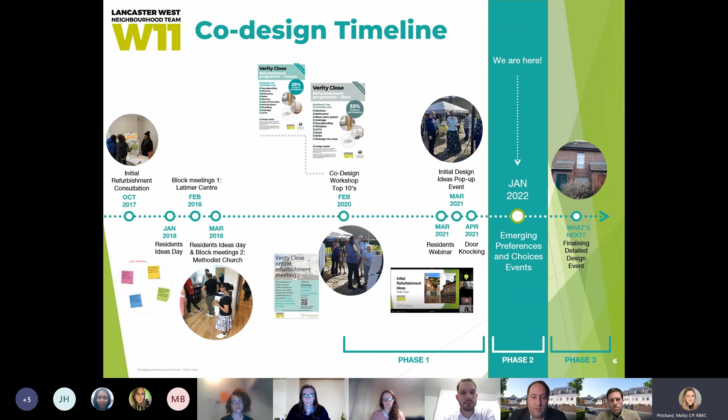So just a reminder, in terms of the top 10s, we're going to talk a lot today about the fabric elements of Verity Close and the heating and hot water. Kitchens and bathrooms are absolutely a priority too, but that's something we've already worked with residents to co-design, providing 12 different choices of kitchen, for example, and 150 different ways we've improved our internal new home standard. So we're not going to focus on all of that today.

We're going to be focusing on wall insulation, roofs, windows, ventilation, and particularly the heat network. That doesn't mean other elements won't get covered - we'll pick them up over the weeks and months ahead. I'm really pleased to say that pretty much everything on the top 10s for Verity Close is now within touching distance of being able to be delivered.

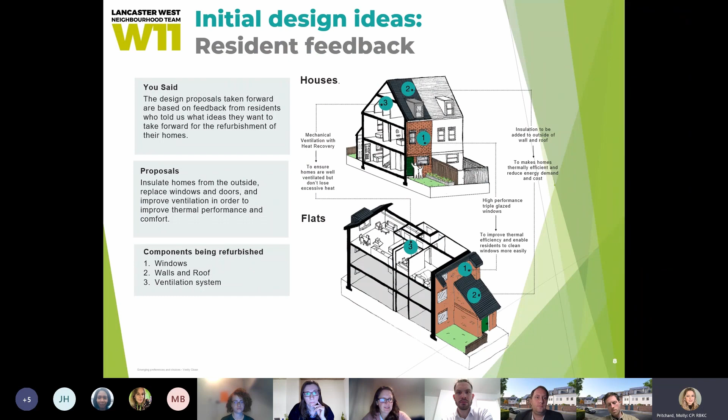So if we could go on to the next slide - we want to look in slightly more detail at the feedback we had from you since the first webinar and at the various pop-up events. Looking first at the windows, the really excellent thing from our perspective is that so many of you are positive about the idea of having triple glazed windows, and even more so that 94% of you are satisfied with whatever is most efficient. We're really keen to give you efficient windows that work well. Later we'll come on to more detail about how they can work, how you might open them, what they can look like, because there will be a change, and there's an opportunity to make sure that change is really helpful to you guys.

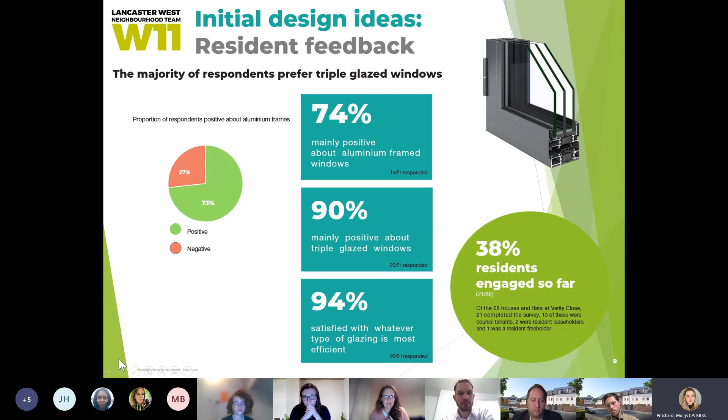And then also looking at the insulation that we're hoping to put onto the homes and the outside finish of that insulation.

Again, really great that 80% of you were mainly positive about the idea of external wall insulation. It's a much more efficient way of insulating a wall than putting the insulation on the inside. Putting that insulation on the outside means we can keep the homes really cosy and warm, like a tea cozy over your house, keeping all the heat in.

And as we've discussed before, we need to then put an external skin on that insulation to keep it dry and weatherproof. Many of you are positive about having a brick skin on the outside, which makes a lot of sense because that's obviously what you've got at the moment. But some people were also interested in having a render finish.

So we'll show you later some images of what both of those might look like, and hopefully seeing an almost real idea of what it might be will help people have a bit more detailed discussion about what you'd like to see. Next slide, please.

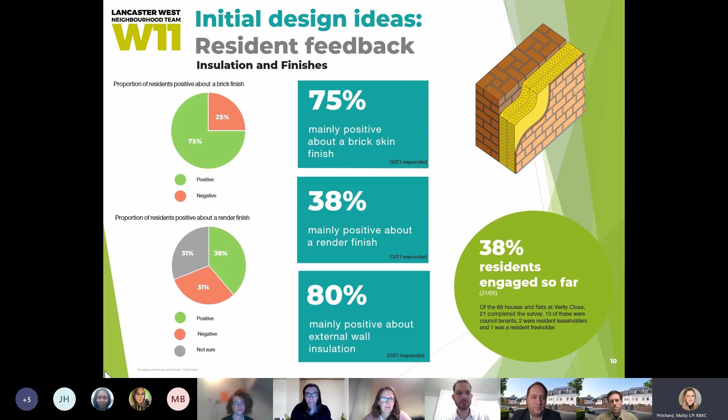It's great also that loads of you are positive about the idea of mechanical ventilation with heat recovery. It will help make sure homes are well ventilated, which is important for healthy indoor living conditions and avoiding mold and so on. But it also means that you're not losing the heat that you've paid to put into your building. So it helps keep you warm, but it also keeps your bills down.

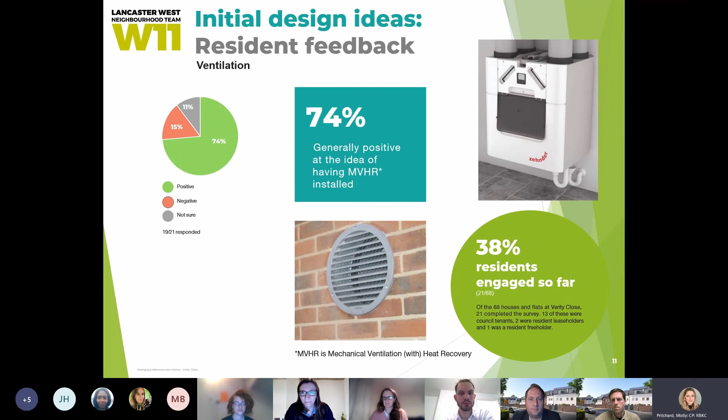So all of these things that you guys have come back with such positivity about means that we've been able to develop these ideas in a bit more detail. And that's what my colleagues are going to come on to talk about with you now. So over to Laura. Thank you, Lizzie.

And yeah, next slide, thank you. So before going through the slide, I wanted to remind you that all of them you can also find in the booklet that you have received. So you can look at them in your own time and calmly absorb all the info, especially the following ones, which may be a bit intense in terms of content, but I'm going to go through all of them, hopefully explaining them properly.

Starting from windows, first of all, as you know, we're going to replace all the windows, and there are choices to be made around how the window will open and the finishes, how they will look.

So I'm going to run through the opening options in this slide, but again, as a reminder, in your booklet you will have more pages that explain in more detail, with more graphics and illustrations, how the opening mechanism will work. And in the baseline there are some frame samples that you can play with and better understand how to open, for example, the top hung reversible.

So looking at this slide now, the first two rows show a tilt and turn opening mechanism, while the second two rows show top hung reversible. And then looking at the columns instead, there are features and characteristics of the windows that you may consider.

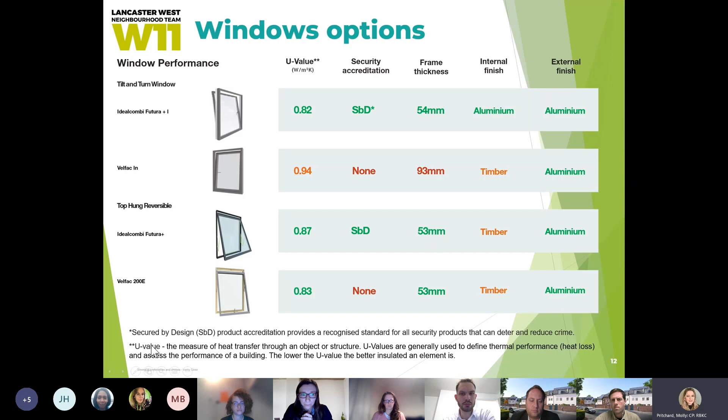In this case, for example, you are invited to choose between the finishes options of the window frame, in this case the internal color options. Next slide, please.

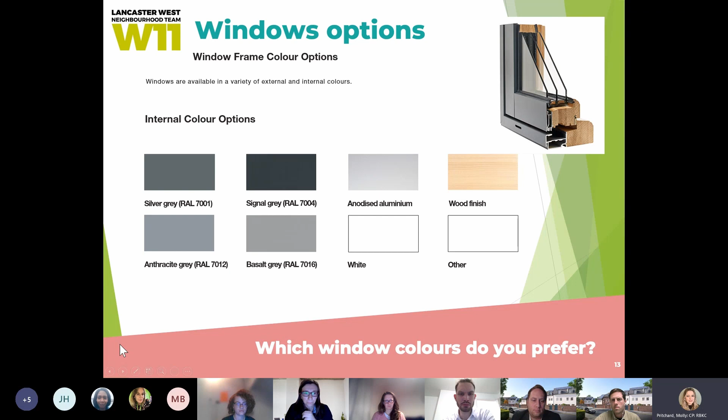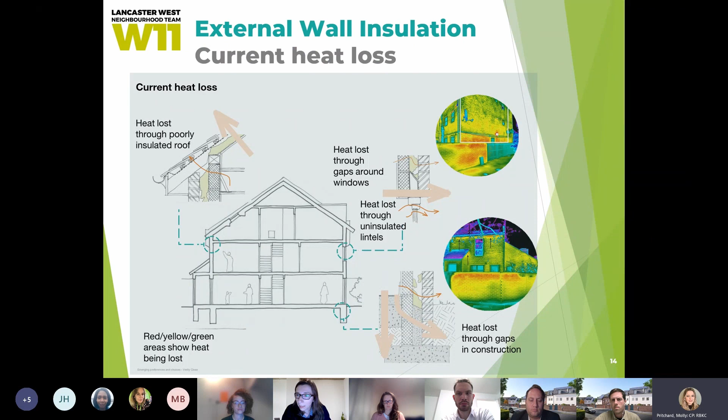As discussed in the previous engagement event, heat is lost through the fabric of your building, particularly at junctions like the wall and roof, the wall and windows, and the wall and foundations, as represented in the image here. On the right, the colored images are thermographic images, and especially on the lower one at the bottom, there is a yellow and red area that identifies the heat loss. You may notice at the junction between the wall and the roof, a crucial point of the fabric.

Talking about external wall insulation, another thing to consider is the overall visual impact of the Close. Residents can choose whether the insulation is finished with bricks or render, and you will see some visual images in the following slides. For now, it's important to notice that as only socially rented and leasehold homes will be externally insulated, the detail between the new and existing facade will need to be carefully designed to ensure a cohesive color scheme across the Close. This is something we'll look at in more detail in the following slides.

I can see Susan's got her hand up there, Maria. Susan, do you want to ask a question? Hello, hi, Susan, how are you? Can you hear me? Yes, go ahead. I was going to query that on the page for external wall insulation, it says only socially rented homes will be undergoing refurbishment, but then you just added leaseholders. I think you must have made a mistake and omitted the leaseholders there. In my brochure, it doesn't mention leaseholders.

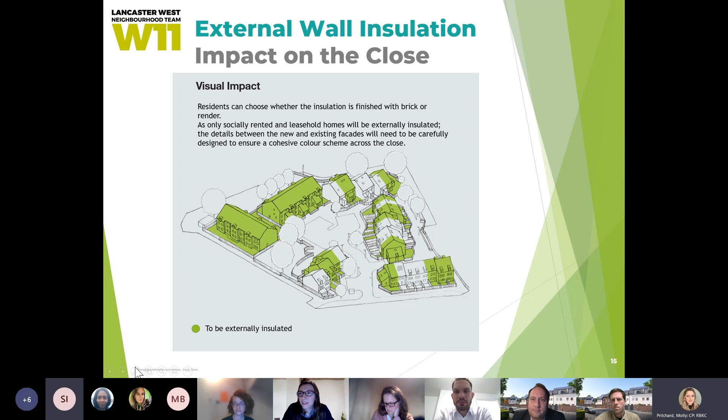To clarify, for leasehold flats, in terms of external wall insulation, windows and ventilation and the heating and hot water, they will be included. So all the elements we're talking about today will be available for leaseholders as well as tenants. That needs to be corrected on the brochure. Thanks for that feedback, that's helpful. Thank you, Susan. Next slide, thank you.

Last thing to touch on for external wall insulation: following the first engagement, 80% were positive about it, and it's worth reminding the benefits. First is improved thermal comfort, then less energy required to heat your home, and as a consequence, reduced bills. Last but not least, less internal disruption. Materials used will be A1 and A2 rated, meaning none or very limited combustibility, which we'll touch on again later in another slide.

For now, I'm going to pass it over to my colleague Phoebe, who is going to carry on talking about the external finishes options. Thank you, thank you Lara.

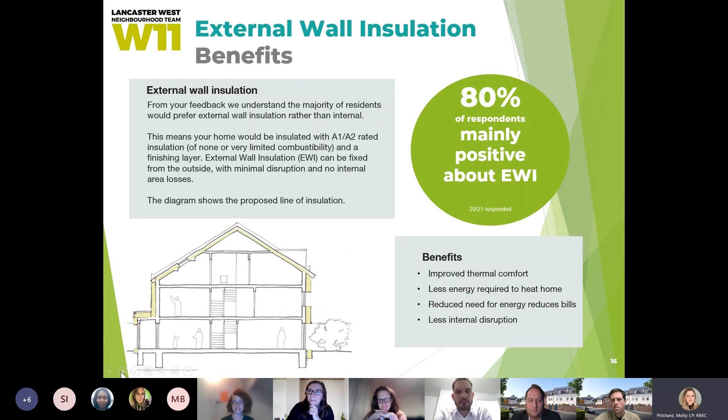I'm going to go through a few visuals we've prepared. As we're adding insulation externally, this gives you some choices in terms of how your homes will look, and we'd love to get your opinions on it. We've prepared a series of images to show some of these options, and also have physical samples of each finish for you to look at in Unit 29. The first finish choice is brick slips, which use slices of real bricks to replicate an existing brick wall. In the first visual, you can see what it might look like using a brick slip as close as possible to the one you have now, shown here on the blocks of flats.

Can I have the next slide, please? In the next image, you can see a close look at how this might look on the houses. You can get a better idea of how the thickness of the external wall insulation and roof insulation affects the appearance. With the staggered nature of the terraces, the thickness of the wall insulation blends in and isn't too noticeable, so you can get a quite close match with the bricks. On to the next slide.

The next image shows another option we've been exploring: using different shades of brick that are complementary to the existing brick and to each other, celebrating the differences in the buildings. Here you can again see it on the blocks of flats.

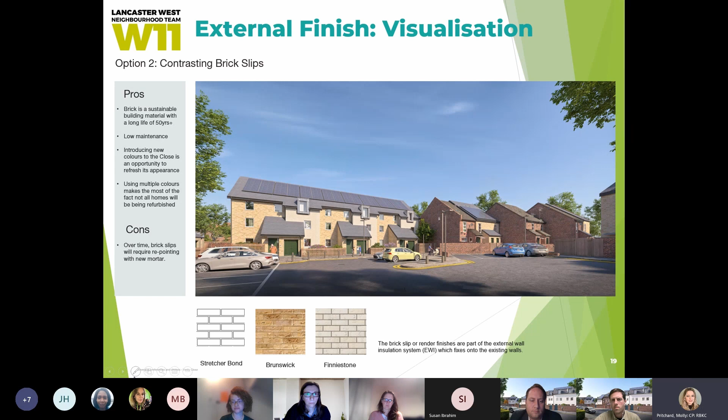In terms of colour choices for the alternative brick slip colours, there's quite a range to choose from. Here's an example using a buff brick and a paler brick against the red existing bricks. And here you can see a bit clearer how the external wall insulation might look next to the existing red bricks, celebrating the differences with these alternative colours.

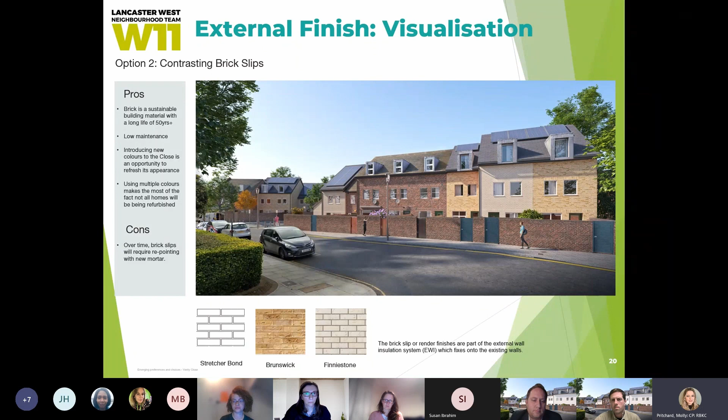We've also been exploring a render option inspired by the local surroundings, where many of the buildings have render but still have areas of brickwork. So we decided to try that out and share it with you.

We developed this further by incorporating two textures of render, one smooth and one rough, as you can see in the bottom left corner. We've done this to bring more life to the facade, using the contrasting textures to emphasize the windows.

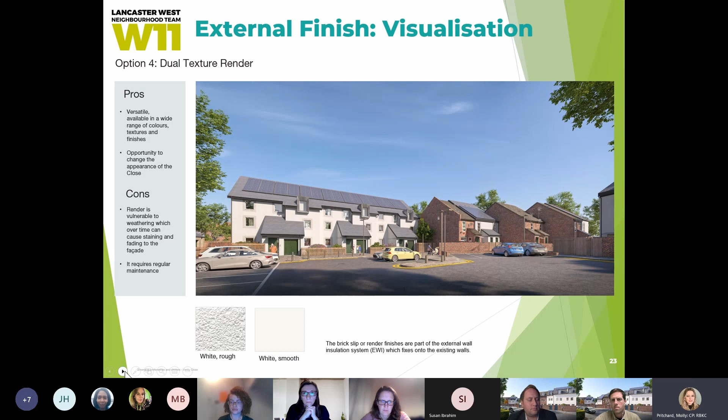And here you are again on the houses.

The roof is also going to be insulated, which means we have the choice to either replicate the existing concrete tiles or change it. Here in the middle you can see a picture of the low energy home we originally retrofitted, which features slate tiles, and on the right the existing concrete tiles next to it. So we could choose to replicate those, or go for fresher slate tiles.

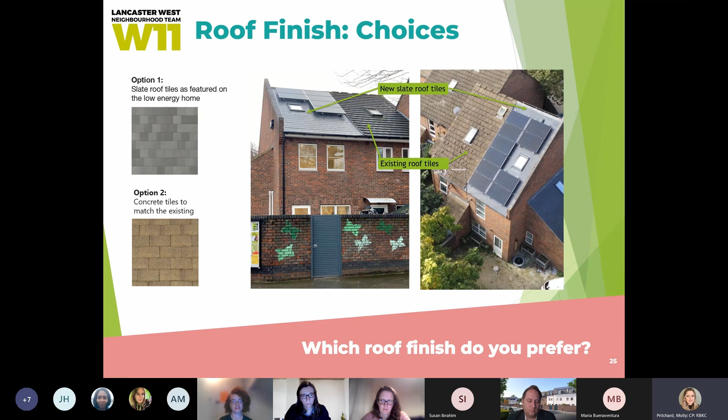Each home will also be fitted with PV panels that will affect the overall appearance. But ultimately all these appearance choices are down to your collective opinions, so we look forward to hearing your thoughts on those.

The dormer windows will also be externally insulated, which means they'll be thicker with a thicker profile. So we're proposing a beveled style on the dormers for a less bulky, more refined appearance. It also provides better solar shading and an overall cleaner appearance.

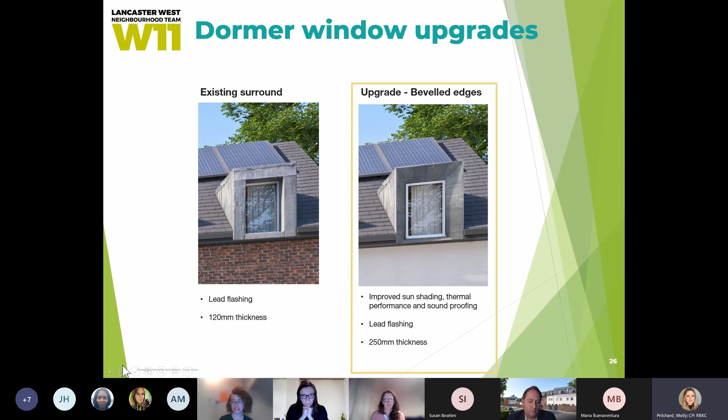I'll move on to talk about the MVHR. Yes, the MVHR, as you know, is what we're going to be using to mechanically ventilate your properties.

At the moment this sketch is just a strategic sketch indicating the possible routes that the ducting for the MVHR might follow. It's just strategic at this stage, but we will have to locally lower your ceilings to hide these ducts. We're integrating this into the design and piloting a range of measures and ways of making this as discreet as possible.

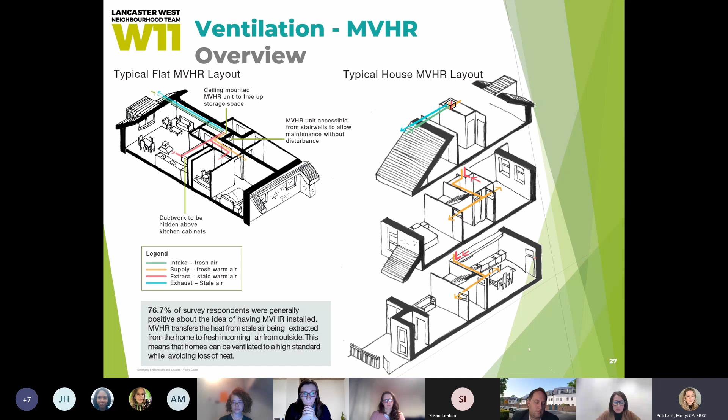For example, in this visual you can see above the kitchen units a slightly lowered bulkhead, and all that is doing is hiding that duct, but it will be integrated with the design of the kitchen, so you will hardly notice it.

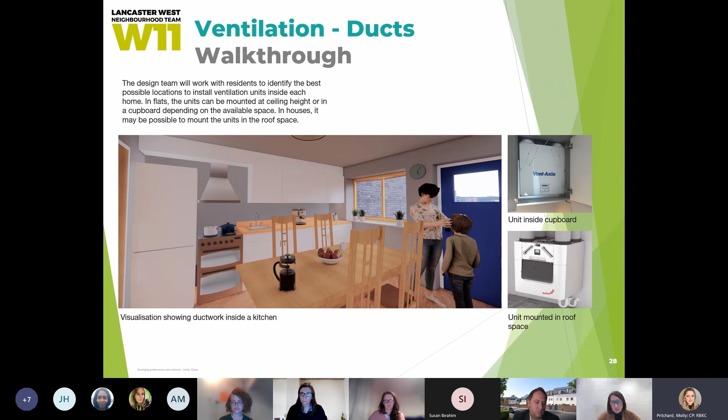This is just an example of what it might look like. As I say, we're looking at a range of measures to minimize the impact of these ducts within the properties. And we've got a little video that shows what this looks like as you move into the building.

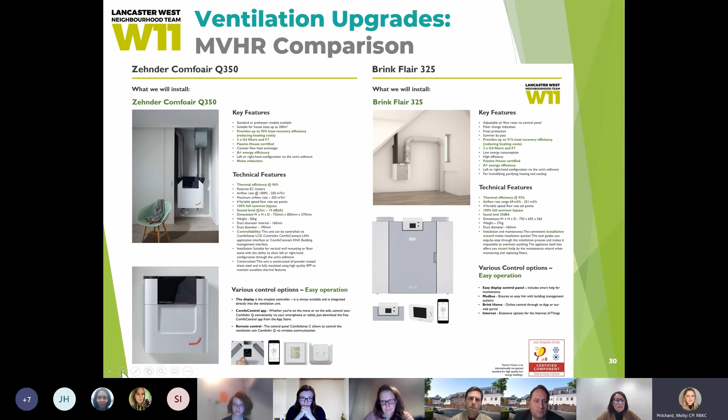Maximizing fire safety is a priority. We understand that this is extremely important to you, and it's extremely important to all of us. We wanted to reassure you because we are going through a very rigorous process assessing the fire safety of each building. We are looking at the combustibility of each material that is going to be put into your house or the flats, and we are being very thorough. We are going beyond what is required by building regulations, so you will end up with a very safe product at the end of the day.

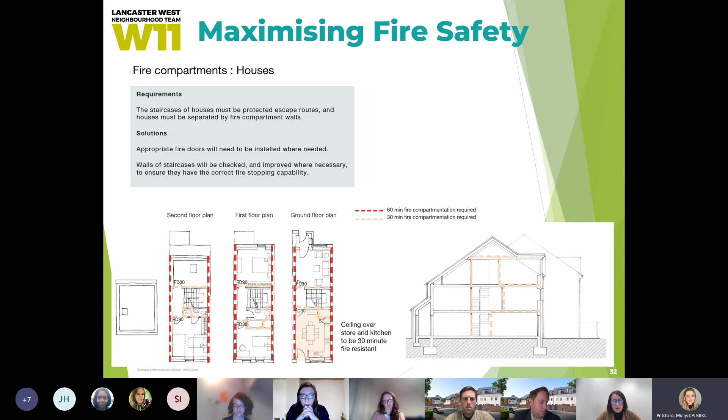Could we have the next slide, please? This is an example of the houses - what we are showing there is that the staircases will be protected, so there'll be very safe routes for escape. Where the red dotted lines are, it shows the separation between one house and the house next to your property - that's a fire line, if you like. So you'll also be protected from the property next to you if there was a fire next door. We are looking at it very thoroughly to ensure there is safety throughout the whole design.

Next slide, please. This is applicable to the flats, and we are working with Lancaster West to understand the remedial works being undertaken in the risers. Together with that, each flat will be protected, and the staircase will also be a protected means of escape. So we are looking at all this and going way beyond building regulations to ensure that this is all very safe.

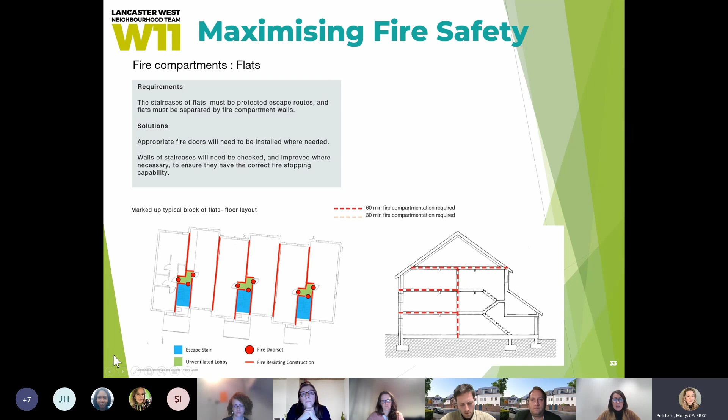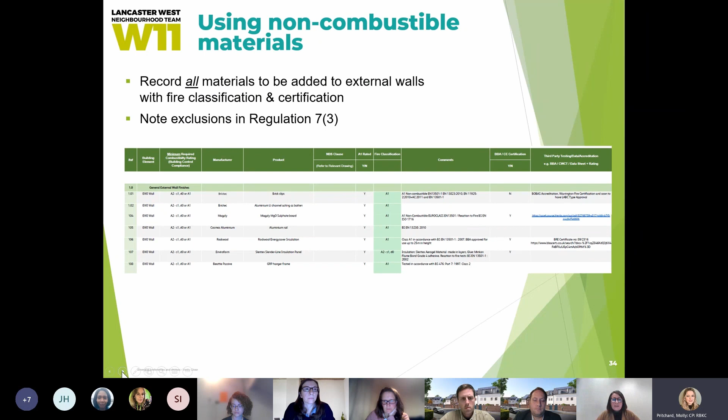Next slide, please. As an example of what I was just referring to, this is a combustibility, non-combustibility tracker. What we are doing is tracking every single material and checking the credentials of every single material, just to ensure that everything installed in these buildings is safe, so that you can have peace of mind and be assured that it will be safe and fire protected. Next slide, please. I'm going to pass on to my colleague Laura now.

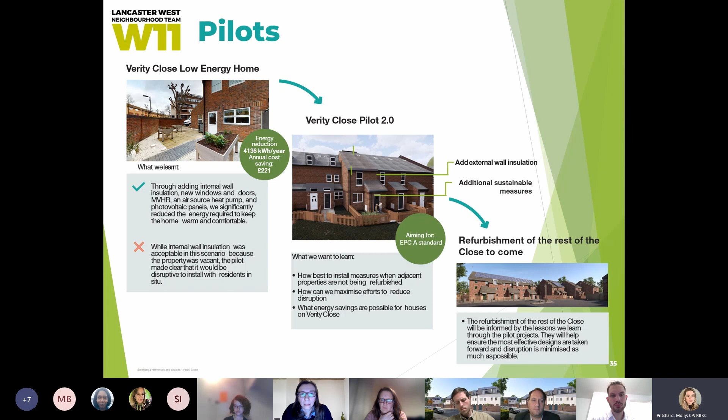Thank you, Maria. Now we look at the progress we're doing and what we are aiming to achieve. With Verity Close low energy home, which has already been completed, the energy use of the home has been reduced. Now we are working on another pilot, trying things out, learning lessons from the previous pilot, and getting better as we go along. The point of this is that by the time we design the whole close, we'll get the best possible outcome, details and design. Next slide, please.

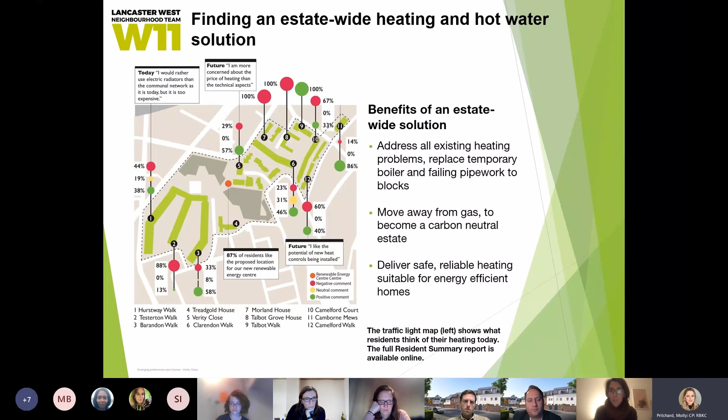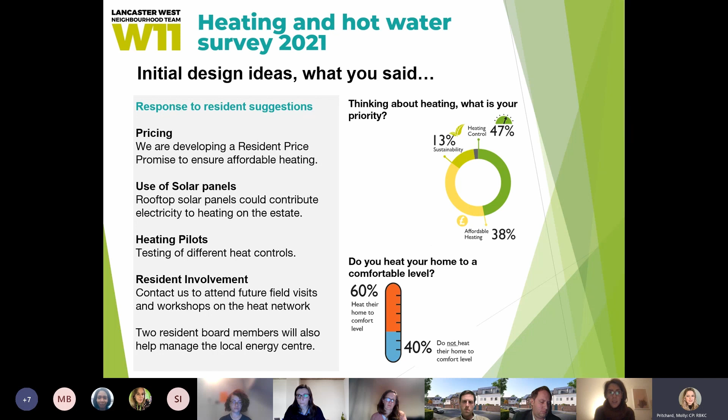Drilling down into what you've told us about heating on Verity Close today - as I mentioned, it's a lot more positive than the rest of the estate. People like being able to select their energy provider, although some have found their providers disappointing, and that's maybe a changing situation. We surveyed households about a year ago, and there have been a lot of changes in the energy market, so we understand people might feel differently about their gas boilers and heating today. It's a very much a live situation, and we definitely welcome your comments.

I'll be at the pop-up this Thursday in Verity Close.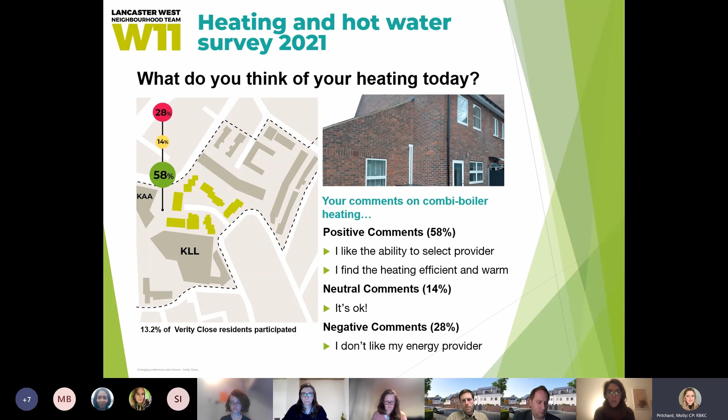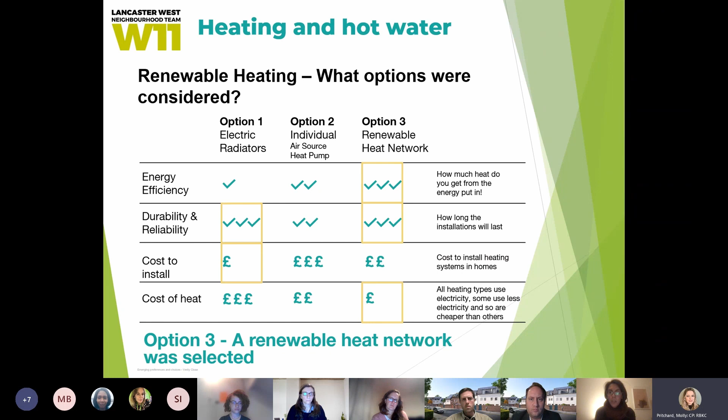So taking us back to basics, what is a renewable heat network? It is essentially plumbing at a large scale. Heat is produced by a renewable technology - in this case air source heat pumps at an energy centre hopefully located on the estate. Heat is then delivered through underground pipes to individual buildings and homes. This should hopefully replace gas boilers across the estate. We have 2 communal gas boilers that will definitely be replaced, and there's the opportunity for individual homes with gas boilers today to also plug into the heat network.

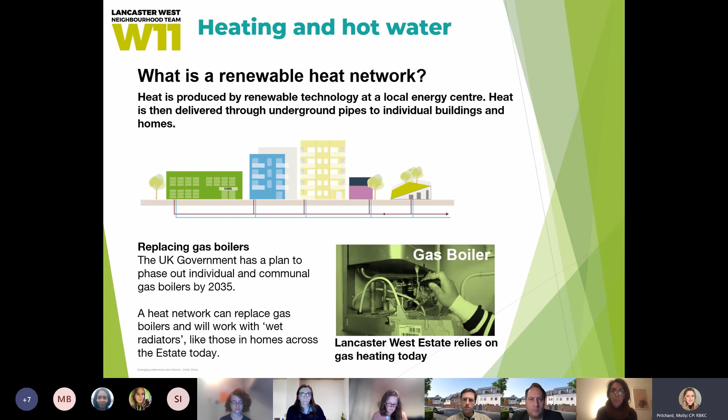So this is just a bit of a recap about how it works. The local energy centre will use air source heat pumps. There's a potential that we'll be able to supply it with electricity from rooftop solar panels on the estate, and there will be heat delivered through underground pipes to individual homes. The billing will be done on a pay-by-use basis via the council.

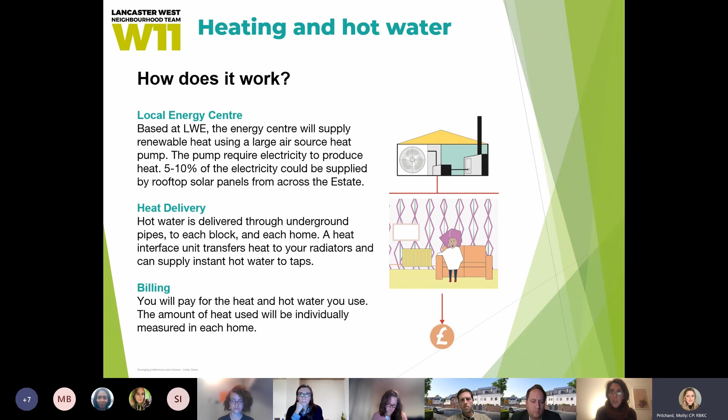So this is a bit of an outline about what would actually be installed in your home if you decided to connect to the heat network. Gas boilers would be replaced with this box called a heat interface unit. It's virtually the same size as a standard combi boiler. You can get some very fancy, slimline versions, but most of them are the same size as a gas boiler. It's got quite a few advantages in that it transfers heat.

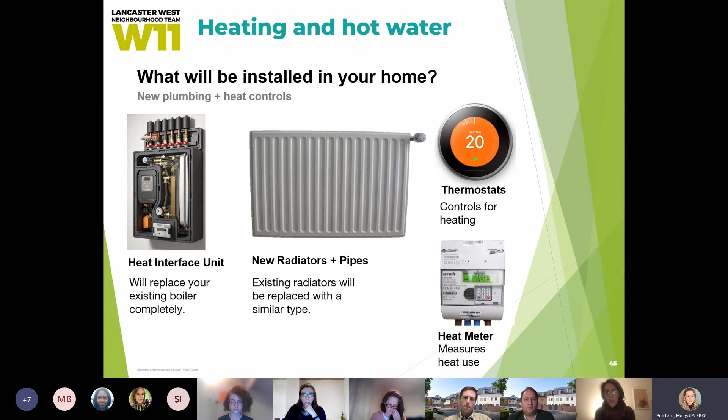It doesn't actually have a flame inside it. We don't have to burn any fuel within homes. It's a very clean technology to have in your home. The other elements of what would be installed in your home are probably quite familiar - standard wet radiators and thermostats that are being trialled across this estate as well.

Just to give an overview about what the heat network can deliver: the first thing is that it's future-proof. The UK government is bringing in legislation to wind down the gas network nationally, with target dates that we won't be installing new boilers in the UK from 2035. They'll be run down in terms of manufacturing and basically disappear as an option. So we really want to give every household the opportunity to connect to the heat network before that happens, and supply renewable energy to everyone.

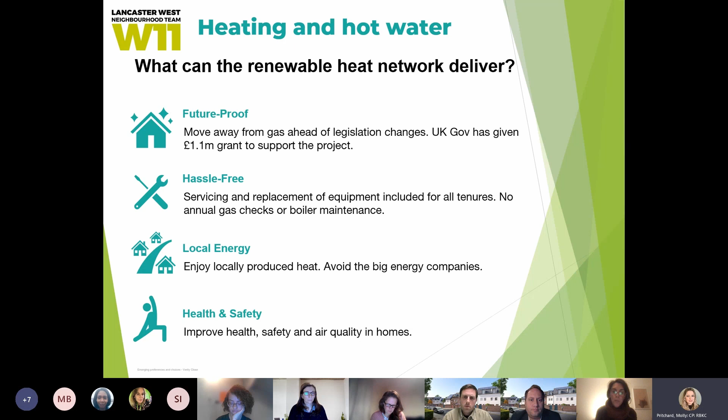It's actually local energy and it's locally produced. So instead of dealing with national gas companies, you can deal with your local energy supplier literally on your doorstep. And finally, health and safety - this system will improve air quality in homes and locally, as you won't have to burn gas within your home. There's no fumes, no carbon monoxide produced, so we're improving local air quality significantly too.

Moving on to affordability - actually installing the heat network is potentially an affordable way to replace your gas boiler. I'm talking here specifically to freeholders, because this is coming in to leaseholders and tenanted properties anyhow. The heat network provides cost-effective heat, so we can use communal electricity to offset the costs. We can access cheaper commercial electricity prices to run the air source heat pump, always at a markdown of what you would pay your electricity supplier - so it's cheaper than running an air source heat pump individually.

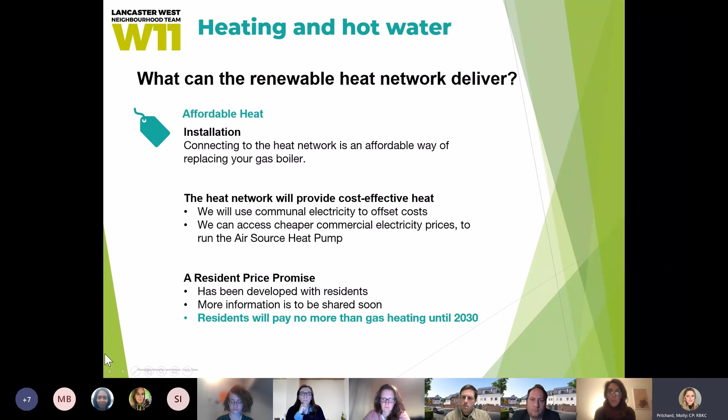We've also been working on developing a resident price promise with residents. There'll be more information shared on this soon, but the overall aim of that price promise is that residents won't pay any more than gas heating until 2030. So we're locking in the price at something that's equitable to what you're paying in Verity Close today.

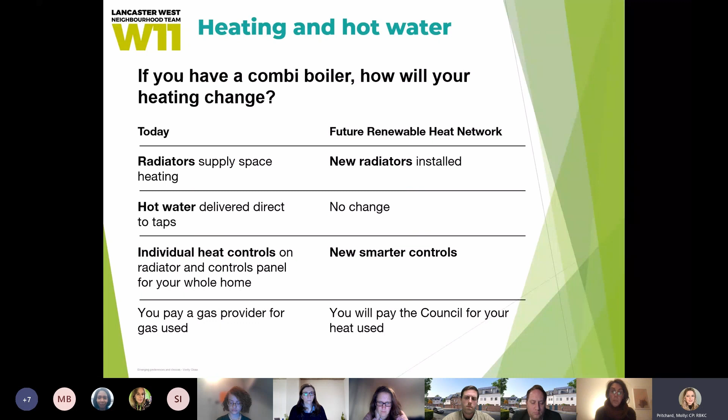To give a general overview of how your heating system would change - on Verity Close, there's very little change, as you already have a wet system, an independent boiler and heat controls, and are able to control your heating. None of that would change under a new heat network. You would still be able to control your heating as you would today. The only change would really be smarter, better controls, and that instead of paying the gas provider, you would now be paying the council for your heating instead.

So when will renewable heat be available? The plan is that the heat network will actually be installed alongside the refurbishment works. Homes will be made ready through the refurbishment to connect to the heat network, and properties from 2024 would be able to connect to the heat network when the energy centre construction is complete.

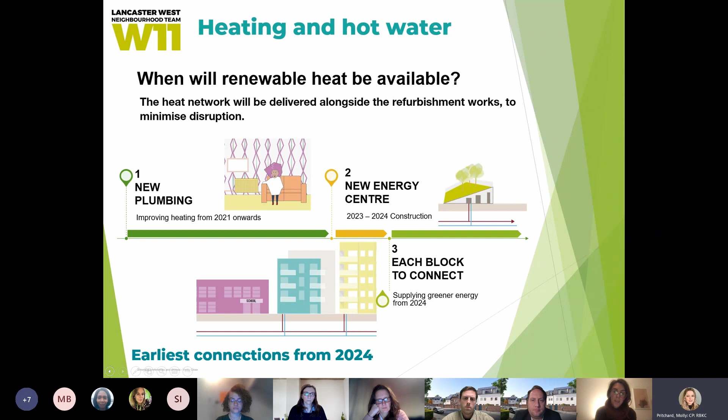So the co-design for the heat network will continue over the next few months. I will be bringing boards along with me to the pop-ups happening across the estate to explain a bit more about the heat network. We will have a local energy centre co-design, and we're looking at options for the location and design, and we'll bring that to residents as soon as we can. We're starting to plan field trips for residents to look at other similar energy centres across London. We're also doing some trial heat meter installations to help residents get a better idea of how much heat they currently need and what they're likely to need in the future.